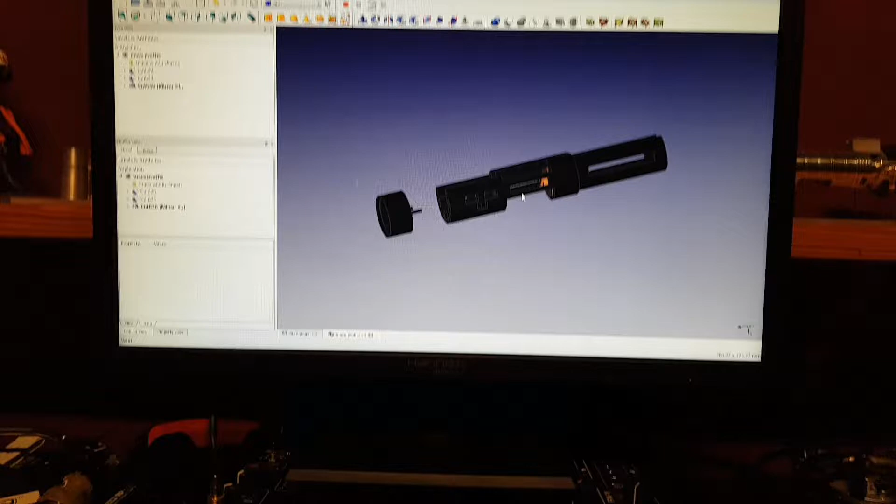Just pretty much finished designing a chassis for fitting of the ProffieBoard. This is for the 89 Sabers Mace Windu lightsaber.

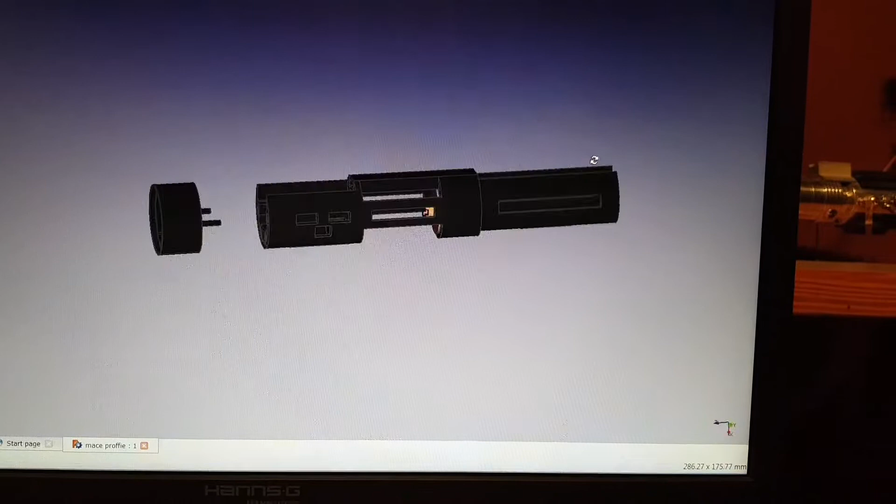Basically, I've printed a prototype and made a few changes to it since I got it. There's the prototype, I'll just quickly show you.

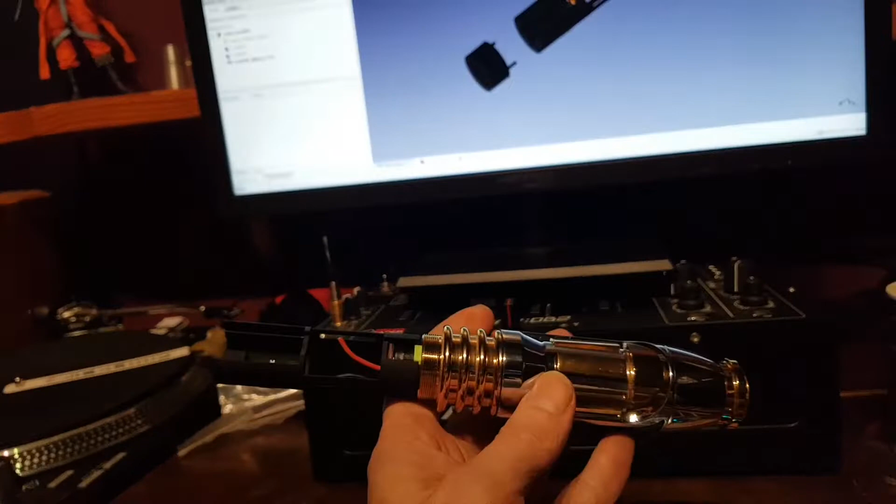In the saber head, that's how it fits into the saber head. It also has a speaker pod which slides in on the end of it.

So I'll just show you. Let me just move this out of the way to give me some space to work with.

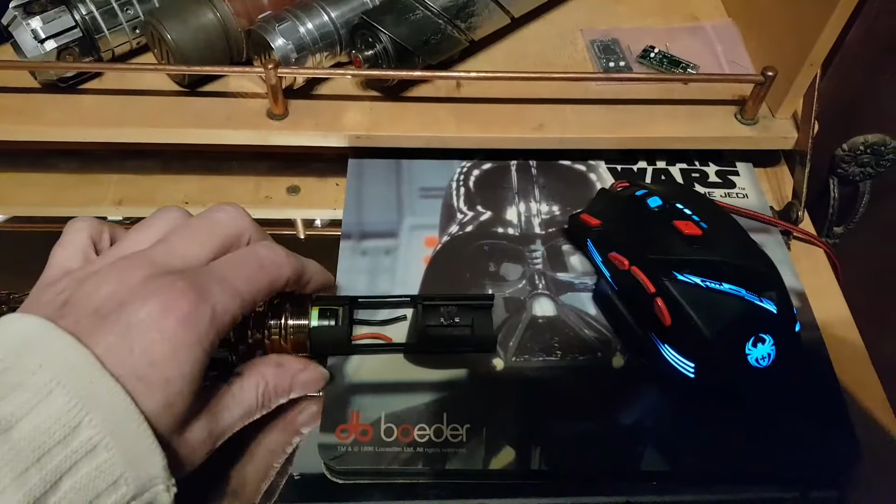Basically the recharge socket is on the side. This section that's open here is for the crystal chamber, which I've just finished doing the design for, and basically it just mirrors itself.

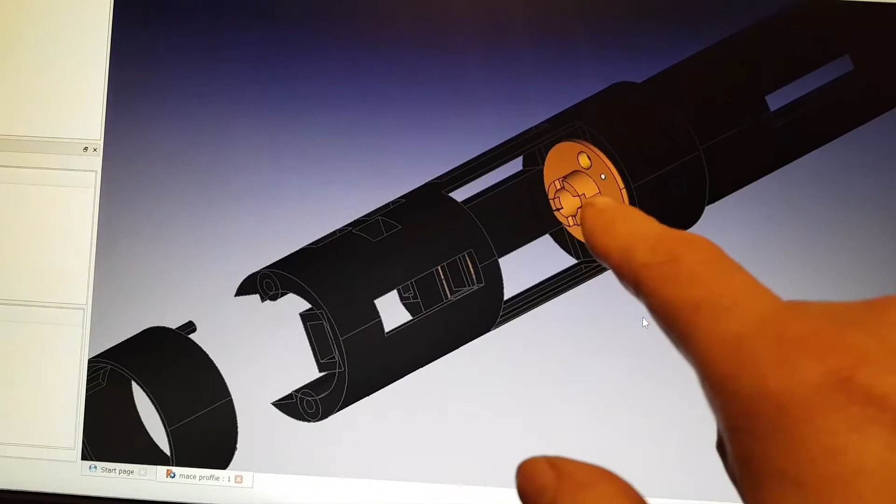So I'm going to upload these parts to Shapeways, and if you want to do the crystal chamber, you just order two of the same part as they mirror each other.

It uses these holes here, the largest of the holes. Those are for 3mm brass tubes, specifically to run the power wires for the battery through.

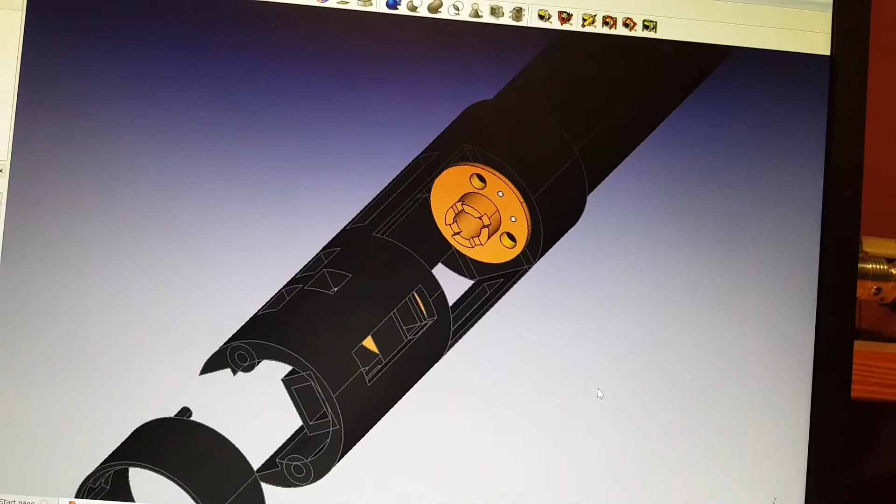And the smaller holes just there are for putting Graflex pins in, or just brass rods which you could run all the way through to the other side.

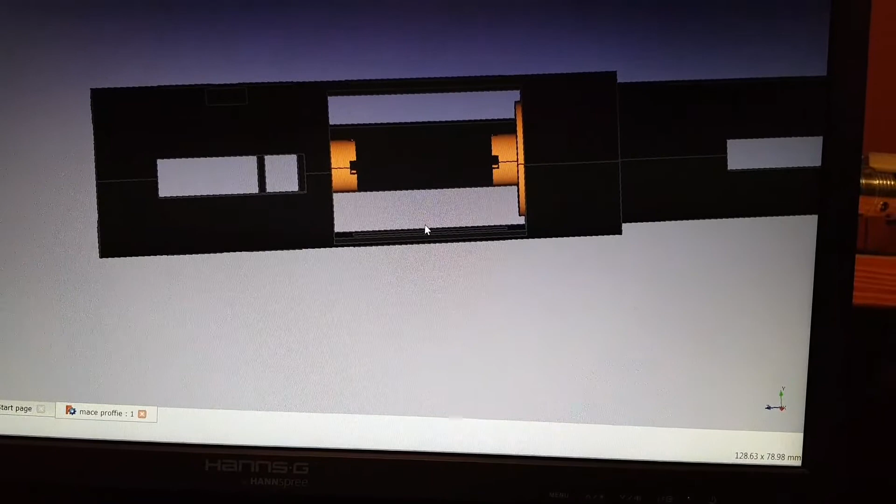The crystal will need to be around about 5 to 5.5mm OD, I believe, to fit in between from what I measured, and around about 20mm long if you're going to be trying to use a real quartz crystal, which I presume most people would anyway.

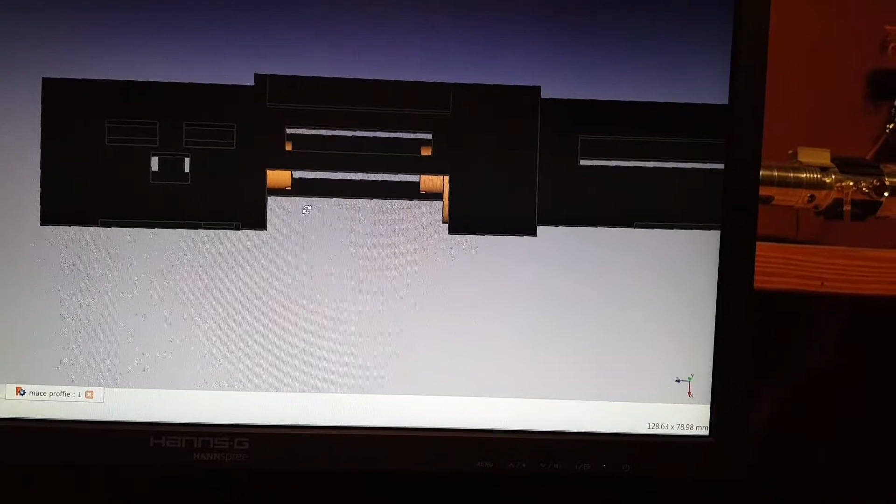So yeah, that's that. A few other details that are different from the prototype - there's a slide switch holder underneath there to cut the power, because obviously ProffieBoard doesn't have the deep sleep mode that the Plecter boards have.

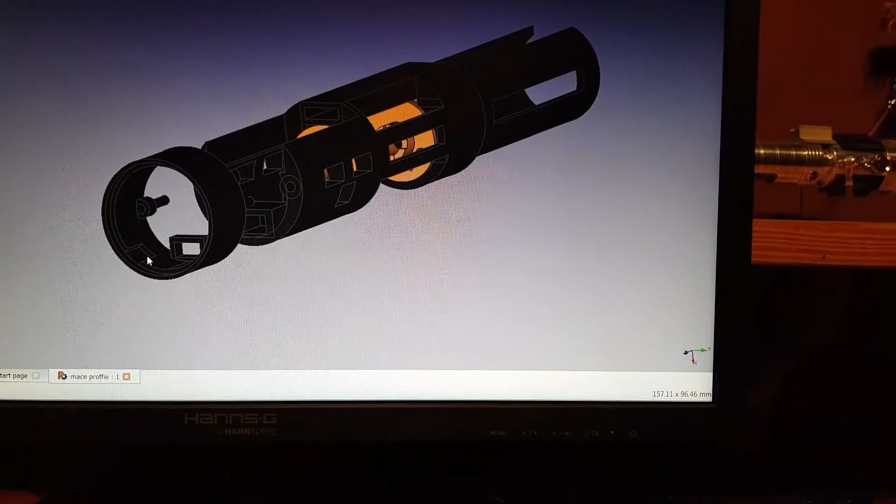And I've modified the speaker pod for slots there and lengthened it slightly, and this is for a 24mm speaker, which you can get from KR Sabers in either a 4 ohm or an 8 ohm version.

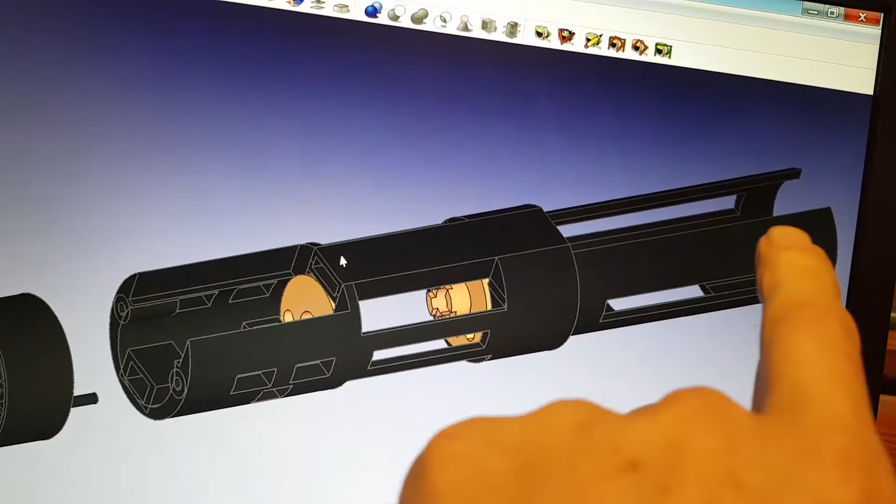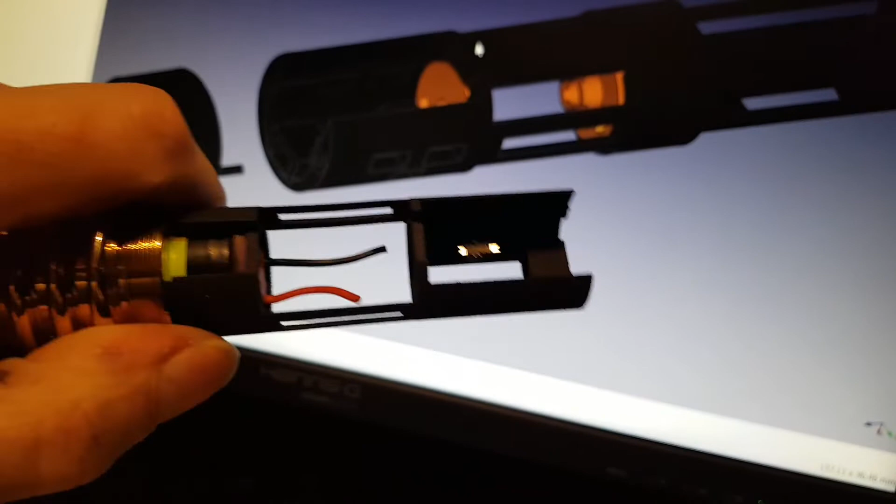The other detail that I changed from the original is all the wires for the pixels, or your Crees and your switches, run through this top section here, so they're all hidden away now, whereas on my original version this top section is open, so all the wires are on show.

But this is basically going into my one, so I'm not fussed. I'm not going to have a crystal chamber. I'm not that bothered about it, to be quite honest, as long as I've got the recharge socket.

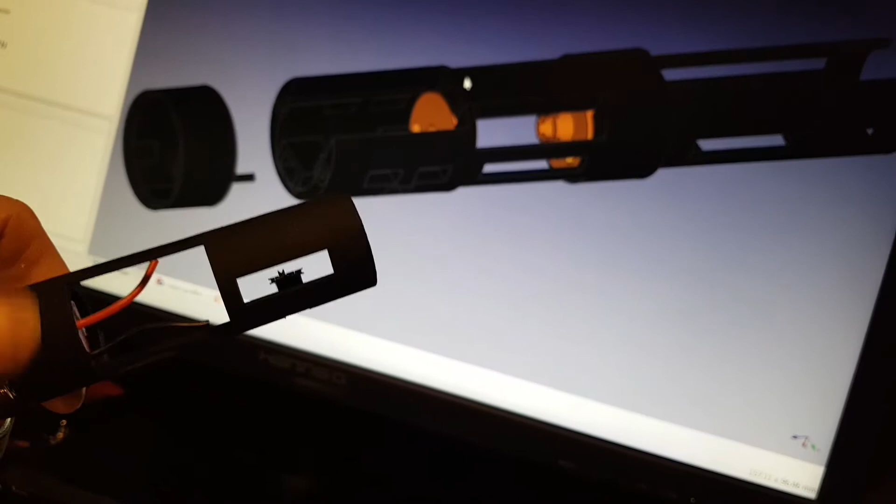But if you can look down there, you can see that there's no switch holder in there on my one. So it might be the case that I'll order this one and not bother with the crystal chamber, but I just don't know, to be quite honest.

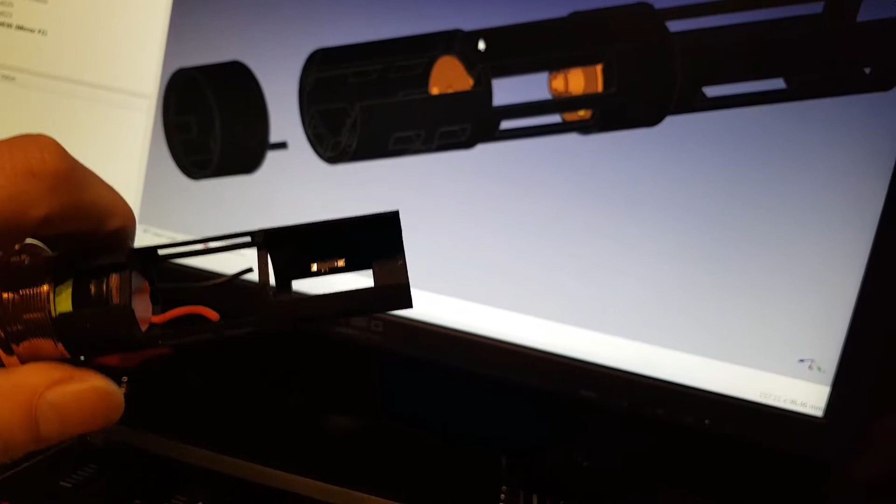I might just hot glue it in down on the bottom, as it's my own personal saber. Hot glue never hurt anyone, as long as you don't make too much of a mess with it and you know what you're doing.

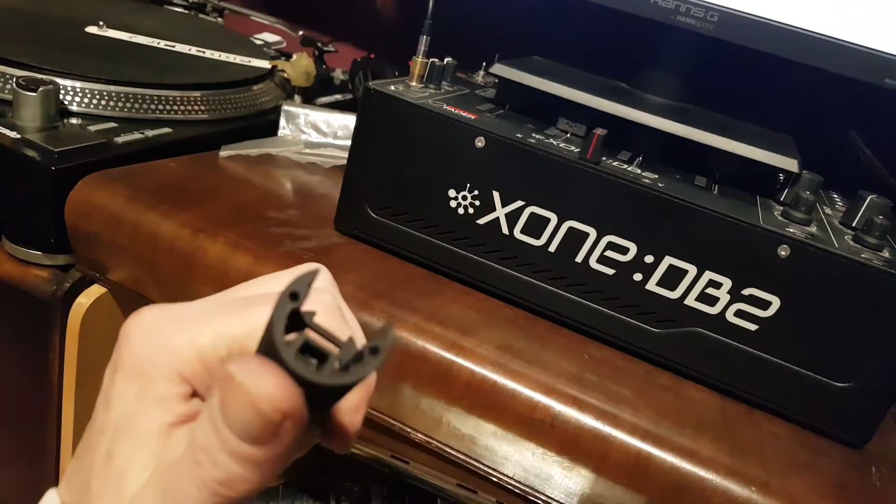So yeah, the other thing is this end box here is for JST connectors, and that is specifically for the speaker.

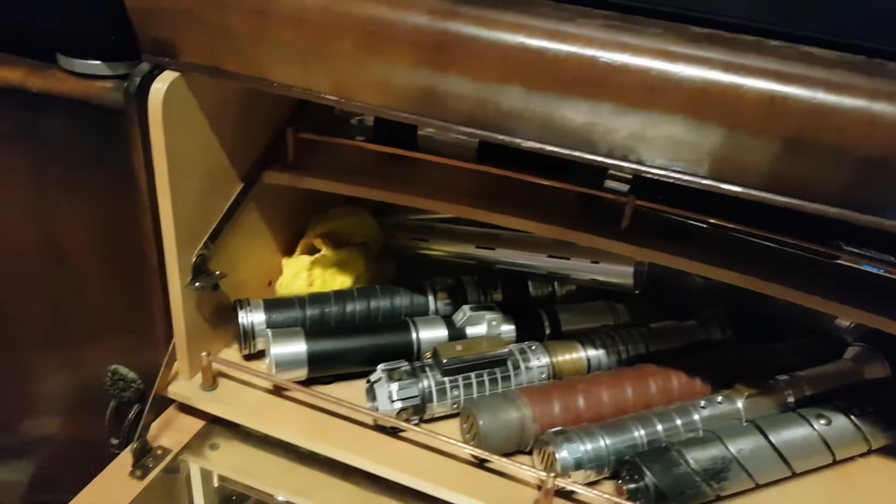Although until I actually try, I know that this will fit on the chassis side, but I'm not sure if this will fit in behind the speaker or not. I've done it on all my other speaker pods, but with the 24mm speakers the amount of space available is quite tight.